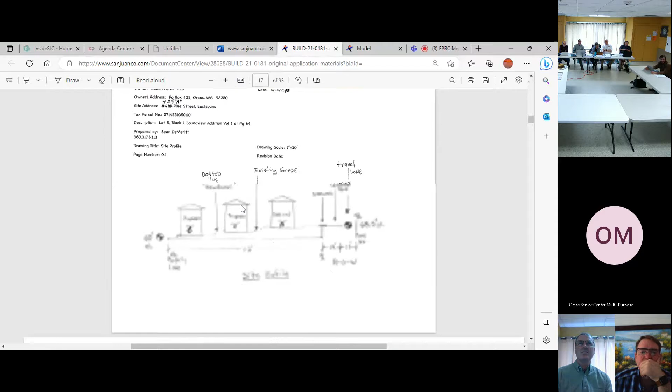Okay, that's perfect Dave, thank you. Right, yeah, there we go. So that was the previous design, and in the upper right-hand corner you can see the 3 parking spaces.

And our concern was that Eastsound, for as long as I can remember and long before that, we've been trying to pursue situations where cars don't back out onto busy roads or over sidewalks. So this design did have cars crossing the crosswalk, parking, and then having to back up over that sidewalk and into the street, which has a lot of safety problems.

So the new design, which they came up with, has a driveway on the southeast corner. And the 3 units are now in a row at the top of the parcel, the north end of the parcel. So another parking space was gained, and no more back-out parking. It's just a big win, and not a real increase in design costs either.

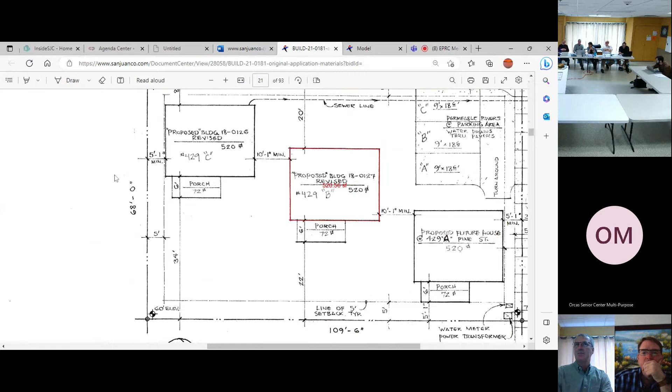Has that been updated to include all structures? Because it used to just be commercial, and it was a change of use we had issues with. It was trying to build under residential and we've been updating it for 2 years. It's not just commercial, it's commercial and anything that's not single family, so multifamily, or meant for vacation rentals or something. Would vacation be classified as commercial? There we go, yes it is.

There we go, yeah, so these are the original ones. I believe the elevations are the same. I believe he's just recycling the same plans.

Does it describe the pitch in the site plan, or are we just guessing? Because that looks a little less than flat. Well, there you go, it's in the far right, slightly to the right. 4 and 12, 4-12.

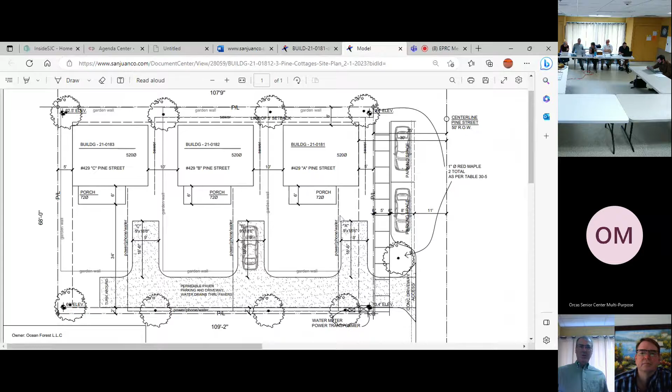So that's exempt. It depends on, so this is what happened the last time with the sheds, yeah, so we consider this kind of a loophole. Yes.

The intent, according to the architects who wrote the design standards, was for the exemption to be for a single building built on a single lot. But what has happened is that the verbiage actually written for the design standards just says single family residence. So what we would like to get changed and put on the docket—unfortunately that docket request never saw the light of day—but what we're hoping to change when we review the sub-area plan is to put verbiage in there that the exemption is for a single family dwelling on a single parcel.

I thought the reason it got through before was because the houses, the four, were divided into 4 separate lots. This is all on one piece. So what Leith is talking about is Mr. DeMerritt's other projects on Prune Alley.

Let's put a fine point on it — the 4 white buildings with shed roofs. Yes, and we went through this with Fishing Alley, the 2 parcels right in town where the upstairs were going to be living quarters. So they got the low roof pitch — we gave the variance on that because they were going to be full-time rentals and they're commercial.

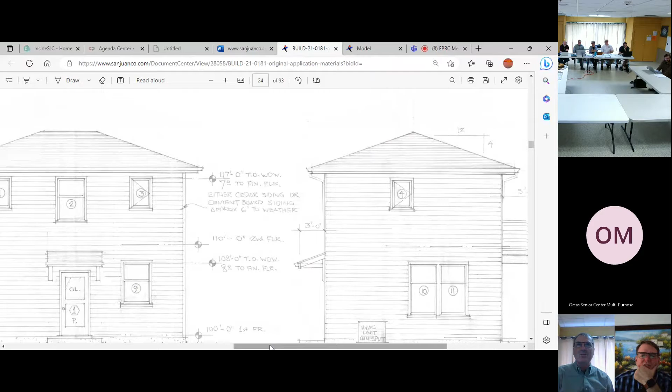It seems like this could be requested at 6/12 and you still wouldn't exceed the building height, and it wouldn't change the design substantially. Do they give a height on that elevation? It's measured from the uphill side. You're probably right, it's only 2 stories. I'd be surprised if we were at the height limit on this. But Dan's point is well taken, that on that slope, the way to measure is going to be important. We should make a note suggesting the department check the elevations.

Well, the 36-foot limit was because we don't have a ladder truck, so you can't have a building higher than your fire department can go and fight. That's the reason behind it. It can be measured from the high side, not the low side, the 36. But if you're just asking for a little steeper roof, the eave is the same.

My whole question was about the roof, the architectural standards, it wasn't about the site or anything like that. Well, the code does say the low side very specifically. These look like about 17 or 18 feet tall, it's 2-story, it's probably good. I still think we should request that. These are not, but that's what forced him to divide them the last time.

Because they originally were requested - I don't know if there's any interpretation of that. That's what Sean did, but I haven't ever seen anything in the code that, as you say, was the architect's interpretation. It was a single residential building, it was not. But that's not stated. I think it would be nice if we just stated this is the intent, we're looking at trying to do 6/12.

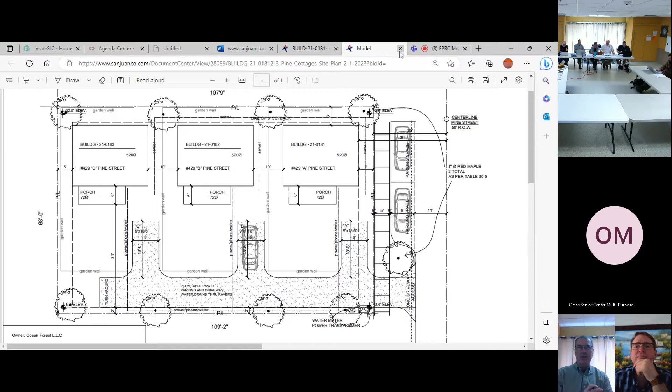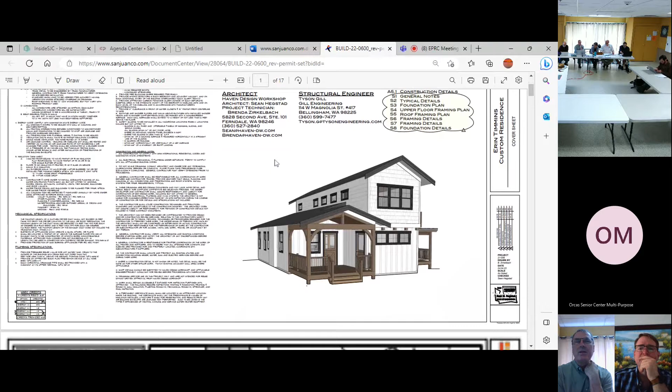Excuse me, so David, this actually brings up an interesting point for us in terms of procedure. I don't know the inner workings of your department, but when this design change, this remodel, first came to us, we made comments, hadn't heard back, but then a new design was submitted. And that was something that Sophia wasn't able to see or determine or search on in the system to show us for permit review. It just happened to be that Gulliver had concerns about the streetscape and stormwater drain that brought it to our attention again. But if you could look into how changes in design could be rerouted to us, that would be helpful.

No, isn't it a whole new permit? It's not a whole new permit, it's the same - it's just a revision, same permit, it's just an additional submittal. Oh okay. So before it was issued, we realized that the house was not going to be remodelable and we had to tear it down and start again.

Just turning my camera off, I'm having some bandwidth issues. Okay.

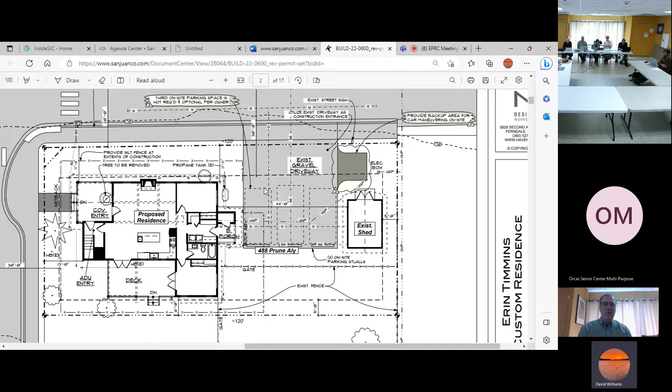And the colors here, what we're looking at right now, are white with a dark window trim and warm white, if anyone's specific. There are thousands of those - it's not paper white, like it looks on there. Cement board siding and asphalt shingle roof.

So one of the things we're including, that we've been waiting for council to do - and it's been delayed because the comprehensive plan took long - is adopting new lighting for dark sky compliance, and downward facing. We're always putting that in now, just so hopefully when that goes through, it's basically the same thing as the ordinance for Lopez.

So just so you know when you're picking out your lights - that was a great idea about step lights for the upper porch and things like that, rather than an outside light. Currently in the code, your porch lights can't go beyond your property line, right? That's what they're saying, as well as now we're doing for dark sky, to make sure they don't shine up as well. And there's a bug thing - backlight, uplight, and glare.

BUG rating - if it's dark skies compliant, then you're golden, you don't have to think of anything else. Are there multiple certifications in that, like LEED or green? We've used these Kichler fixtures that are just covered. I don't know if you guys can select ones that are good examples or that you're happy with. If it says IDA compliant, that's all you need to know. IDA is International Dark Sky Association. Okay, that's what I was looking for.

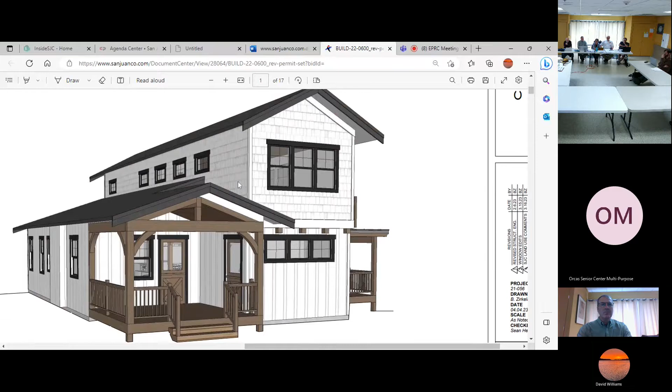What makes me think they weren't able to make the connection is they said to fix the old pipe, otherwise we could have abandoned it. Your design doesn't interfere with that storm drain, it's really outside, in front of that old shed.

It seems like defining the curb of the driveway cut to make sure public works can confirm sight lines are set back from corners, and allowing for space to do compliant stormwater work and a sidewalk over it once completed. I have to work out something so the county feels confident we can perform our duty and install it if possible, but let's let everything else go forward with the house construction, since there seems to be more to this plan with the properties up by the school.

I do want to compliment the county for working with us and giving us a connection to the stormwater, because on such a small lot it'd be impossible to properly distribute it otherwise. They stubbed out a 6-inch drain for us to connect to, so there was coordination there. We got that far, I just don't know the other end of it.

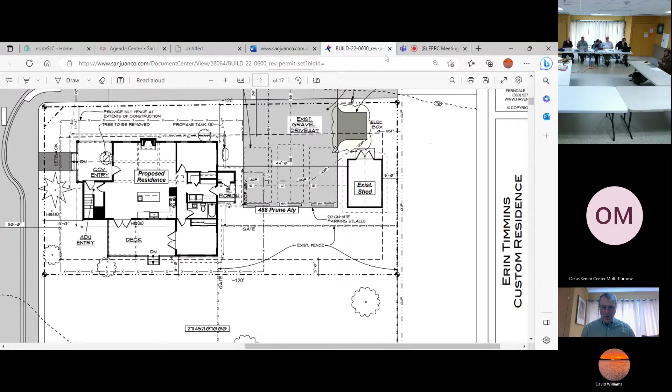Okay, so the next order of business is the continued review of the Eastsound Sub-area plan's goals and policies documents. We had a work session the Friday a week after our last regular scheduled EPRC meeting.

We took all those notes, and Brian and I did a reorder of the goals document. Aside from some formatting and numbering issues, we've added a table of contents which was sorely missing. There were three different numbering systems in the old sub-area plan; now we'll have one. There were also three sections referring to parking, and now only one. We also added a housing component, since surprisingly there was no commentary about prioritizing housing in Eastsound, and we now have a version of it.

The last things to nail down are our wish list maps for trails and roads, which we talked briefly about with Colin last month. We need to agree on what our trails and roads maps look like, then submit those to Colin to make sure they don't conflict with Public Works' plans for Eastsound. I basically took pen and ink and drew existing and proposed trails on one map, and proposed roads on another. I'm sorry I don't have multiple copies, but I'll let you guys look at them.